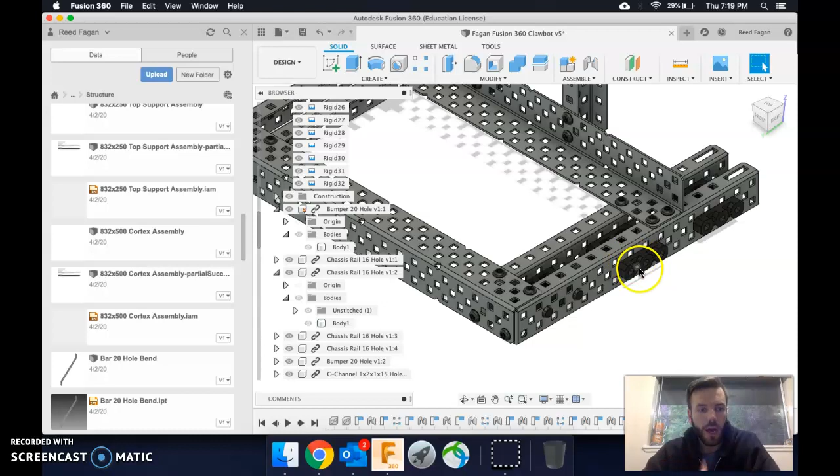So maybe it's good that I made that mistake, because it teaches you a new skill. The following video I'm gonna make where we actually create a separate component with a rigid joint between our bearing flats and pop rivets — I'm probably mixing up my Autodesk terminology — that's gonna solve what I'm doing here and make everything easier if we do that first. When I create that video, I'll drop it in before all these other videos to give you guys a heads up.

So with this, they're on the wrong side, but there's actually not too difficult a way to fix that. What I do is open up the joints parent — that's what they call these little arrows. And wow, there are a lot of joints. Fortunately I've already kind of checked this, and I remember these are some of the last joints I made, so if you can remember something like that, it's easy to find.

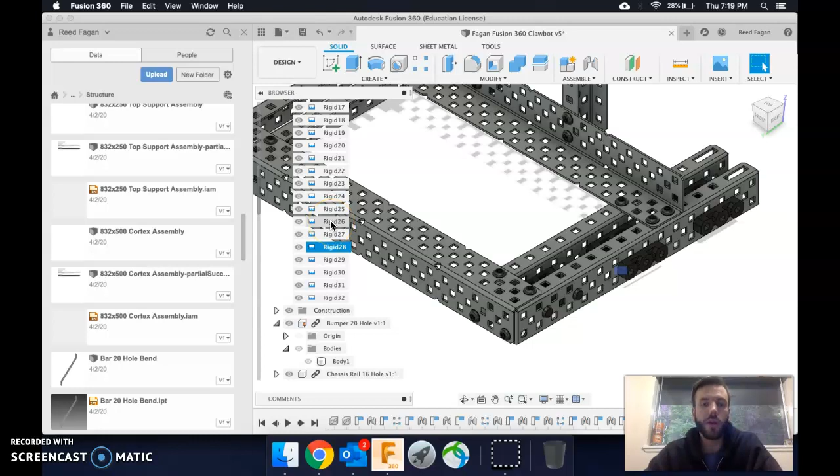I'm just going to hover over or click on these joints until I find the one I want. Okay, so 27 is that one, so I'm going to go up one — 26, there it is, that's the one I want to adjust. There's a little blue box highlighted on it right now.

So I'm going to right click on here, edit joint, and really all I need to do is click this flip button. All right, so I flip it, and that flipped the wrong piece. That's interesting — it's probably because I did the one piece to the other piece. However, because of another joint, that piece shouldn't move. Let's see what happens when I click OK.

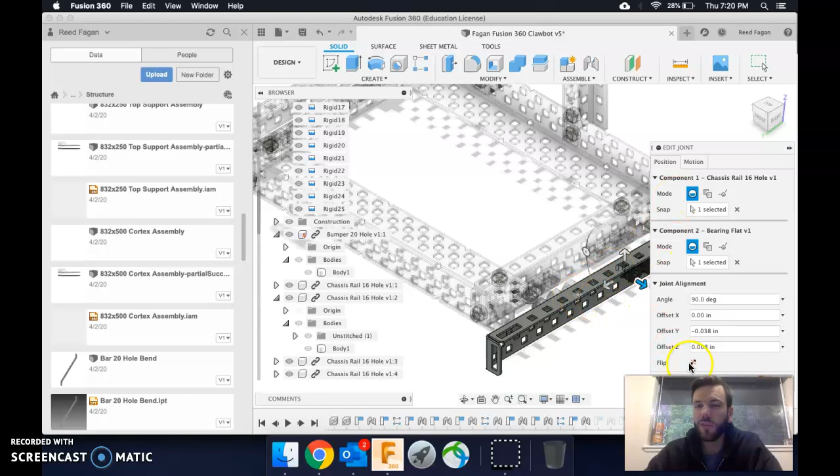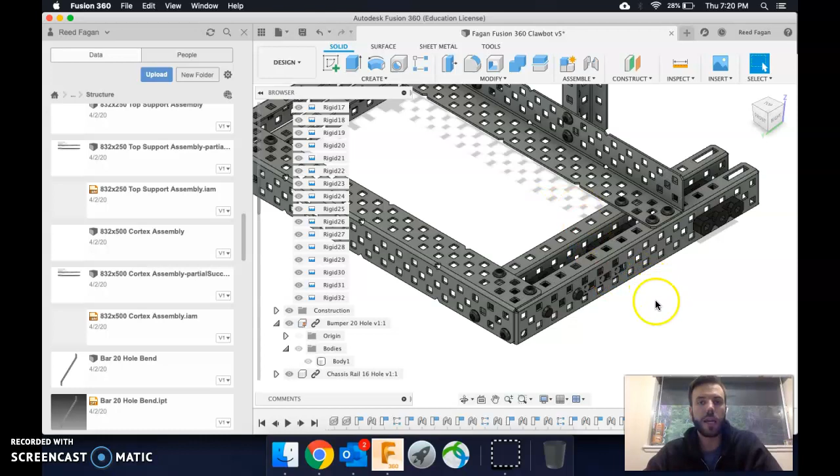All right, and as I was thinking, it did fix it correctly. Because this other piece kind of scared me — it looked like it was going to move around that bearing flat, but it was already joined. So it has a further back joint, so maybe it respects that kind of seniority, like the earlier joints there.

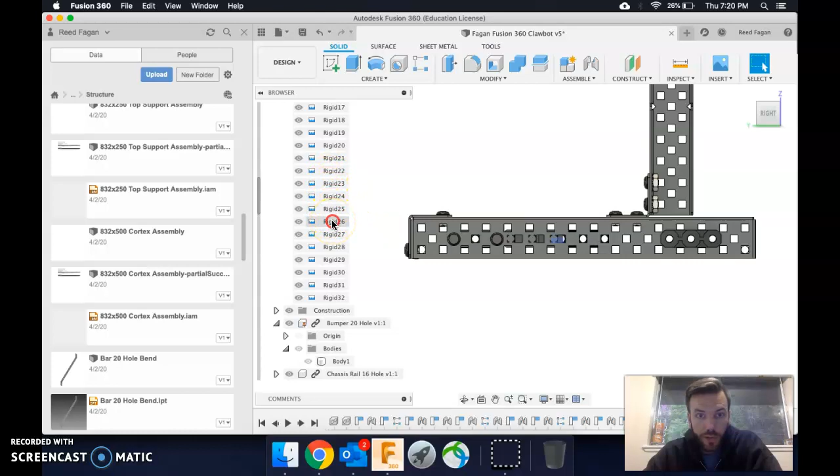So I've got that piece down there, and again the best thing to do to finish these up is use these square-on views. So I need to actually join it correctly. I clicked finish, although I really wasn't finished — so that's 26, let me edit again. I'm going to zoom in, and as you can see I did flip it around, but it's kind of not centered the way I want.

So I'm just going to drag the arrow until it's fixed. Again, it's showing that other piece moving, but whatever it takes here. Okay, that looks good there, and actually it looks pretty good up and down. Last thing to check before I click OK is let's go to the top view.

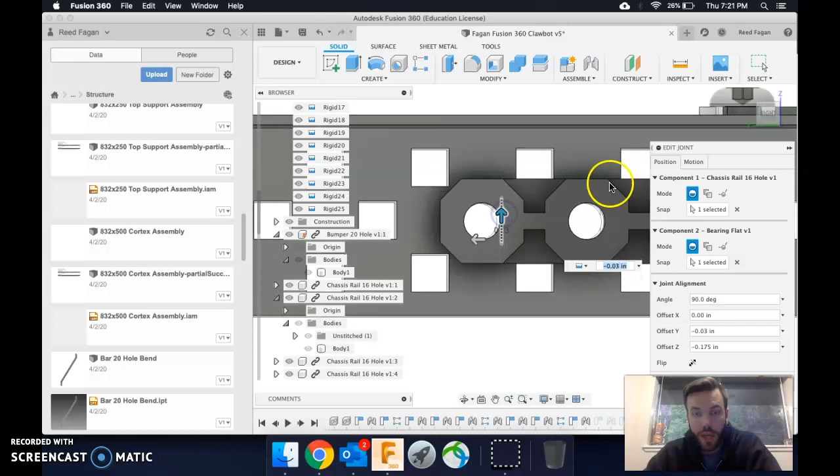So I'm going to click this little arrow and go to the top view on my view cube. And there it is — we just want to make sure it's not poking through the other side. It'll be better, because this thing is kind of in our way in this case, if I go to the bottom view. Now I can see it better.

I'm going to drag this just about like that. I want those lines to be lined up right. Perfect — click OK, and now I'm set. If we go back to our home view, we see good, that's been taken care of, and it is fixed.

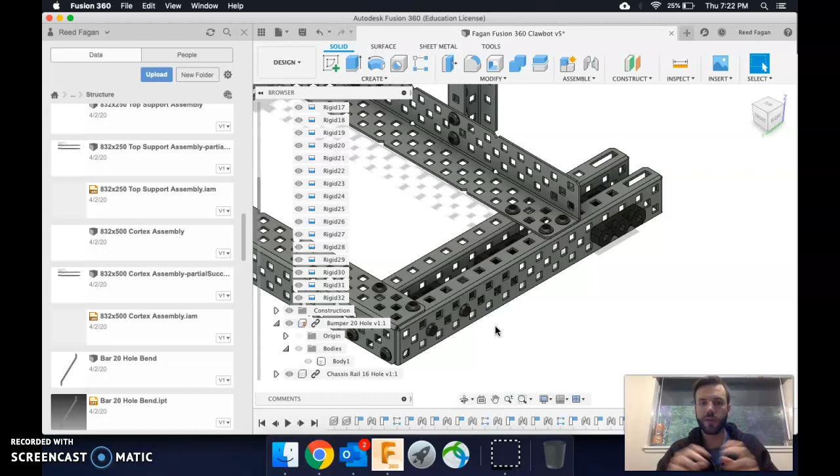So the next step will be putting these bearing flats in — you see I've got a couple in here. I'm going to show you one way to do it, although this way takes a little bit of work. That's why the next video will show you how to make another kind of component where you combine — a subcomponent or subassembly, whatever you want to call it — a single bearing flat and the two pop rivets, because I looked at them and they're all the same on the whole Clawbot.

All right, so you only have to make it once, and then you have it for the whole thing, okay? But what we would do is come over - so this is in the structure folder, if we're in this thing over here, Clawbot robot.

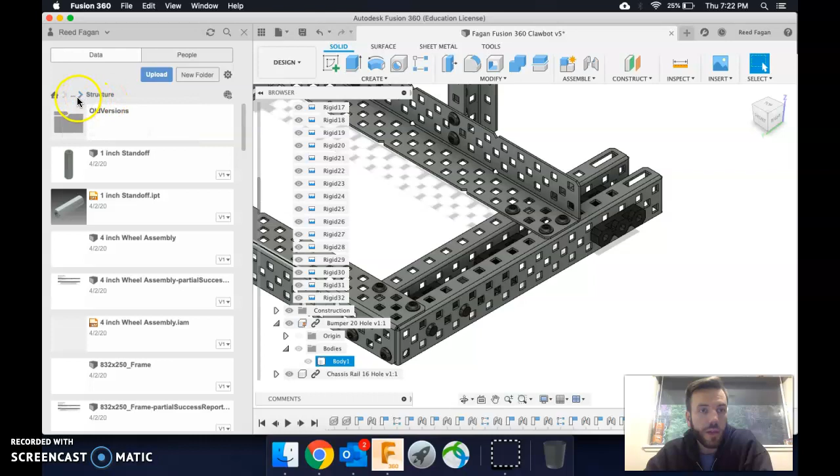So go to structure, you're gonna find your pop rivet. We want the file that's F3D, not the IPT. Right click, insert into current design. Okay, there it is. I'm gonna zoom in.

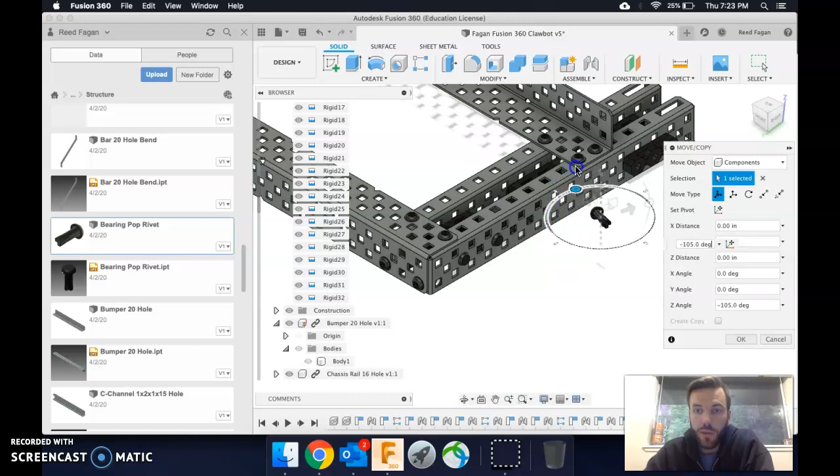I'm going to drag this over a little bit, and because of what I'm going to do with it, I'm actually going to turn it this way so I can see this face here. So I'm going to say OK.

All right, and now I will join it. Let's just be consistent - the first thing is set, and then the second thing moves to that, right? So let's choose the first thing to be our bar this time.

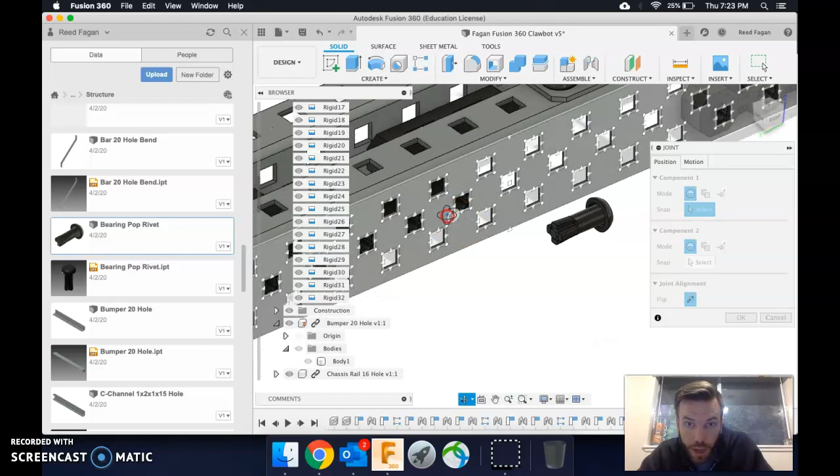So I need it to join to this outside hole. I'm just going to say, sure, this surface right here. That looks good, okay? And what I want that to join to is specifically this face right there, all right? So that's what I want.

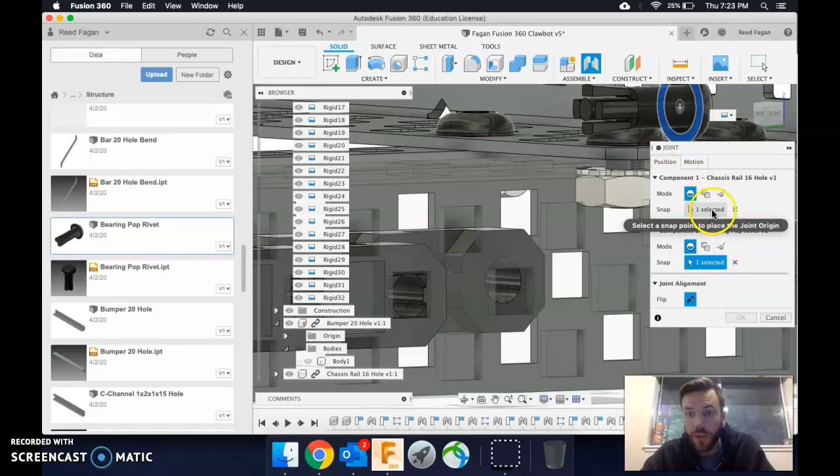Of course, it is kind of being weird about that. Let me try something a little different. I'm gonna deselect that. Let's try doing this one first, okay? Just see if it'll make it a little happier. All right, so got it.

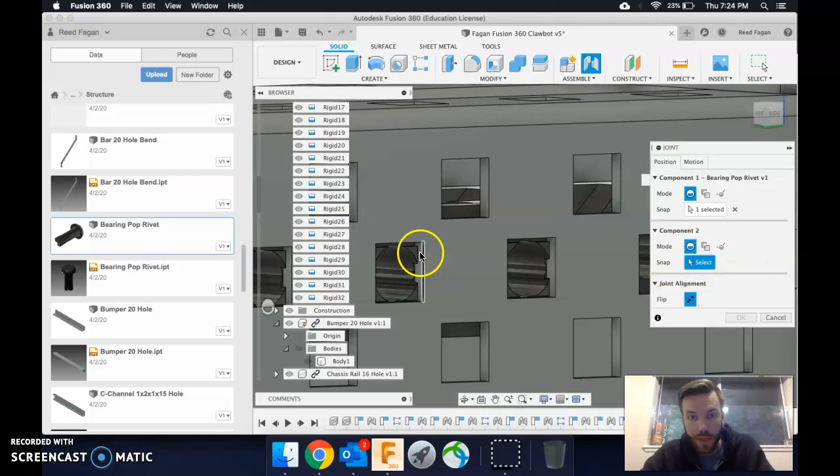And then I come over here and we're ready to select this. And let's try that again, about like that. Perfect. Okay, so we're gonna go square on view so we can make sure in the 3 dimensions it's correct.

At least for these first 2 dimensions. Okay, so side to side it's looking good. And now it's looking good up and down. And then we just want to go to the top, make sure it's good there.

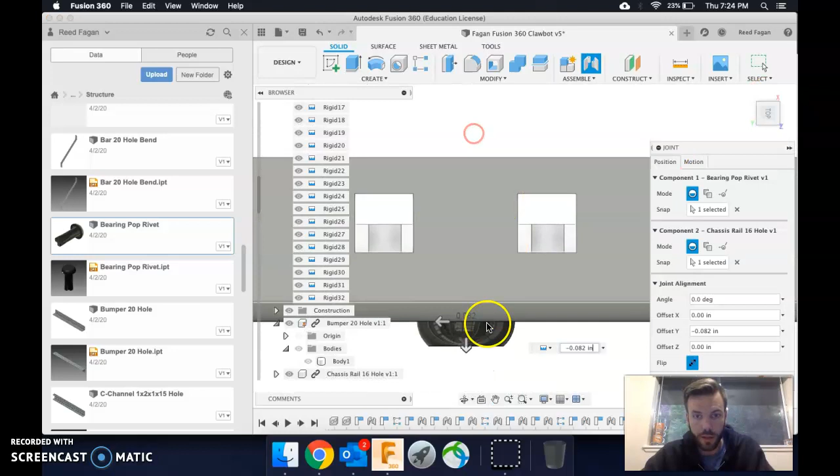All right, so try backing it out a little bit. Okay, looks like it is perfect. It should be, because you were joining it to that face - a face to a face. So click OK. There we go, we got that one in.

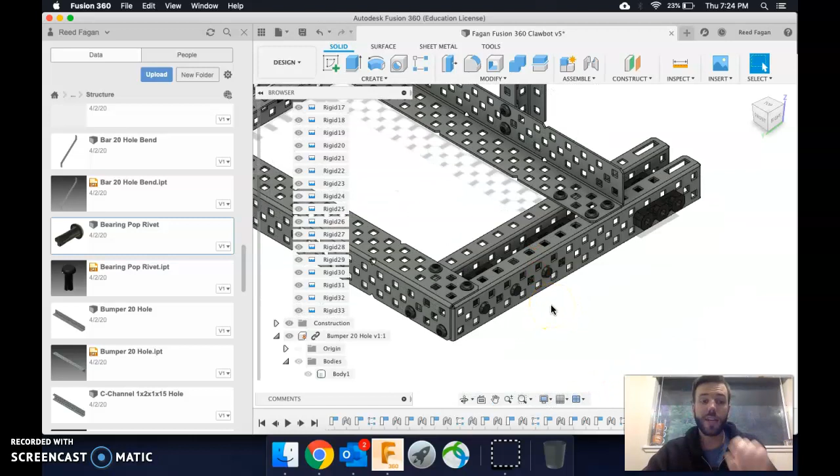So you might be thinking, ooh, this kind of takes a while. Well, here's the second sheet, which again is not going to be as good as the next video I show you, but the second sheet would be - look, I've already got these things here. I put 2 in, so what if I just, let's get rid of this thing, okay?

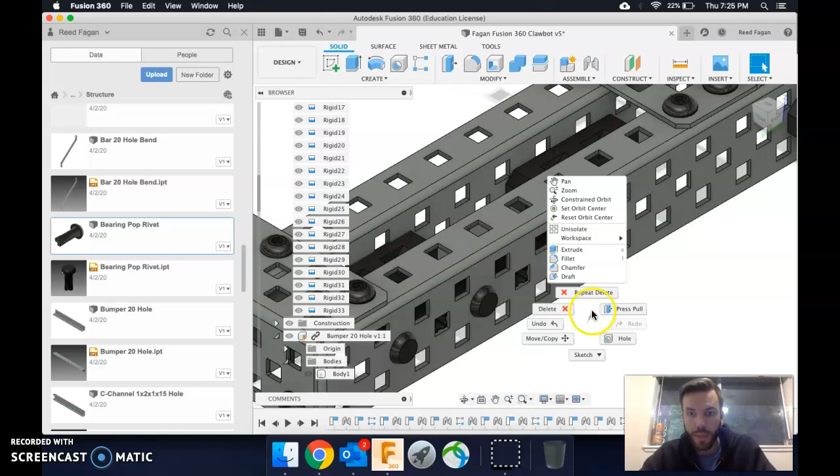And say, we want to select - oh, it's being difficult. Okay, so again, let's say delete, and we want to select that, and it is not letting me do that. I could also just go to the very bottom here, and I should be able to do it, because it's going to be the last piece that was put in. All right, so we're going to delete this.

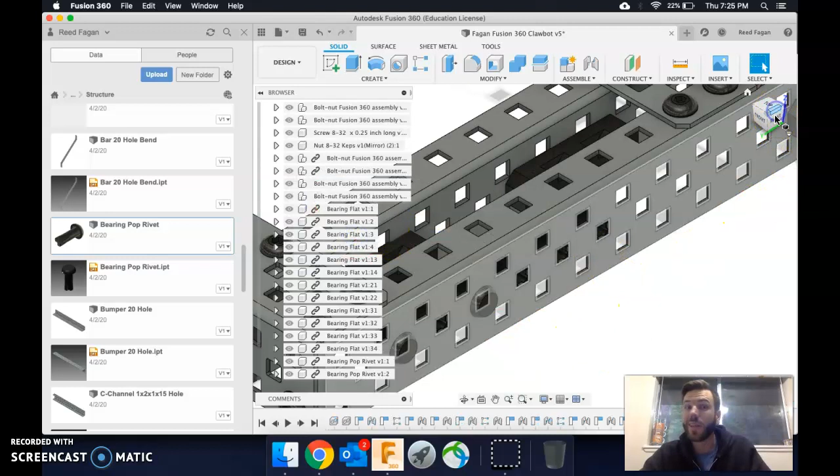Yep, delete. Okay, so now I can use the rectangular pattern again, like you've seen before, except this time I'm going to pick 2 components to rectangularly pattern, all right? Forget that this piece isn't in the right place yet - we can deal with that later. But what we'll do is rectangular pattern.

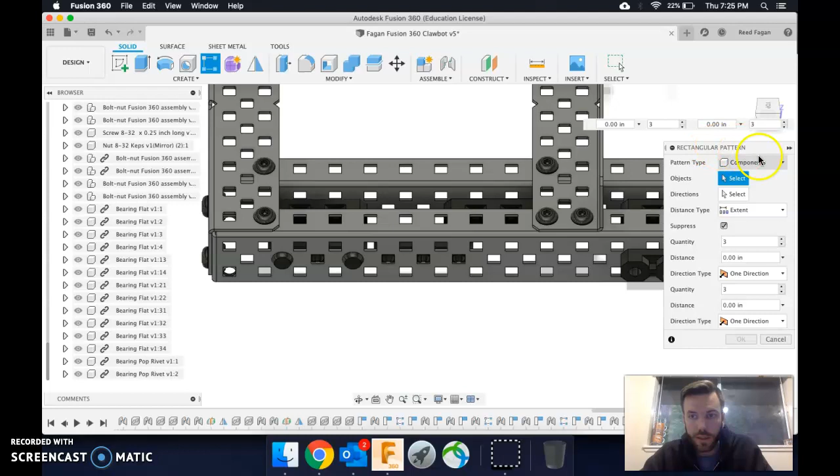Okay, let me minimize this data panel so we can see a little better. And we want to select - we want this to be on components, so good, it's on components, okay? We want this, and we want that, okay? So it says 2 objects selected.

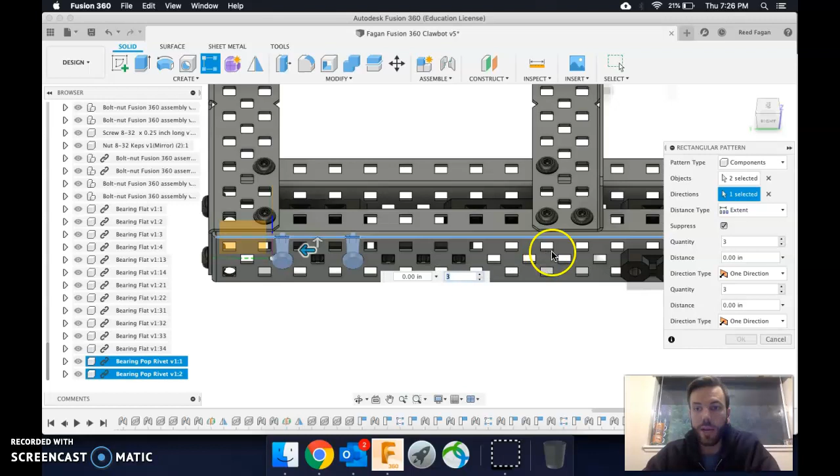All right, so now the direction - I've had a little trouble with this, but I want it to go along that line, so good, it's giving me that option. If what you click doesn't give you the directional arrow you want, you might need to click some other part of the geometry, all right, to get it right.

And quantity, yeah, we do want 3 of those. And again, it's going to be that 2-inch difference, right? So I can start dragging these over, all right? And, oh no, sorry, I think it's a 5-inch, yeah. So I'm going to go ahead on here and say -5 and hit enter. And boom, there they are.

Okay, so the reason this isn't quite as good as what you're about to see is I still have to go in and put the joints on there. The next video will completely erase that. I say next video, it's possible you will have watched it earlier by the time you see this one. All right, thanks. Here we go.